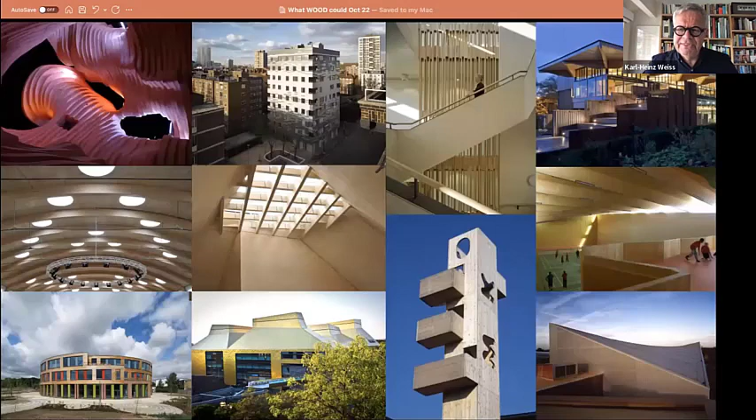Going back, just a quick introduction of myself and a bit of my journey, to explain why I got to this title of the webinar. Over the last 20 years, I have been involved in more than 150 engineered and mass timber projects.

This is a snapshot out of the work we have been doing back then in the UK. Whilst being really in love with timber, I started my career as a cabinet maker actually, and then turned into a master craftsman and studied industrial design and timber engineering. So there is certainly a very strong affinity to the material.

But whilst doing all these beautiful timber buildings and being exposed to that environment, I had actually been living there. This is the Barbican in London, built around the 70s, started off 1968 and took about 10 years to complete, where 5,000 people are living.

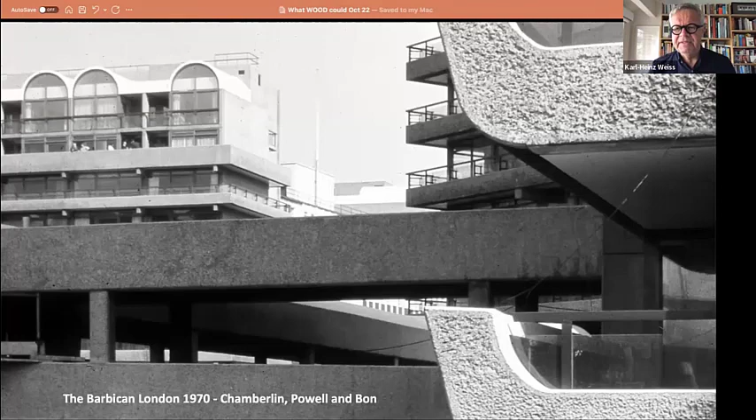I had the pleasure to live, and I moved around a bit in the Barbican, in this concrete brutalist structure. I had an apartment there, and later on I moved up there. And it was beautiful, because the space was right - the space, the cross ventilation, the layout was perfect. So it's actually not that much material driven.

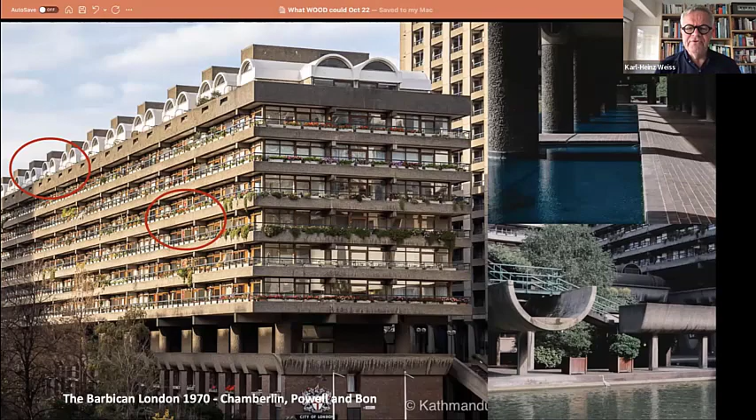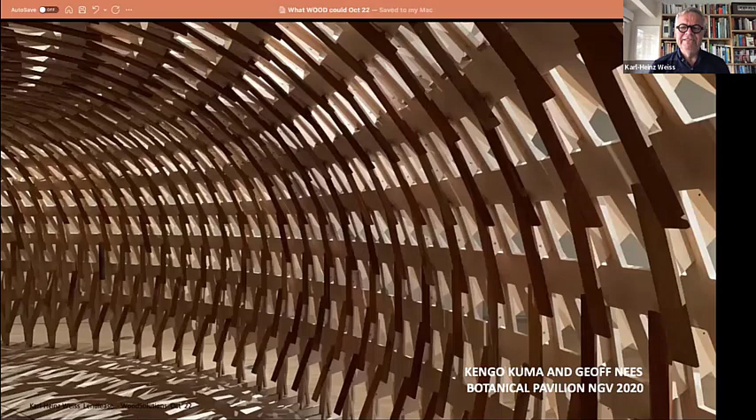At the same time, I found myself over and over again in very intriguing timber structures. And again, the space is right, and the space talks to you, and yes, the material is supporting that. In this case, it's the Kengo Kuma and Geoff Nees Botanical Pavilion, which was on display in the NGV in Melbourne for quite a while.

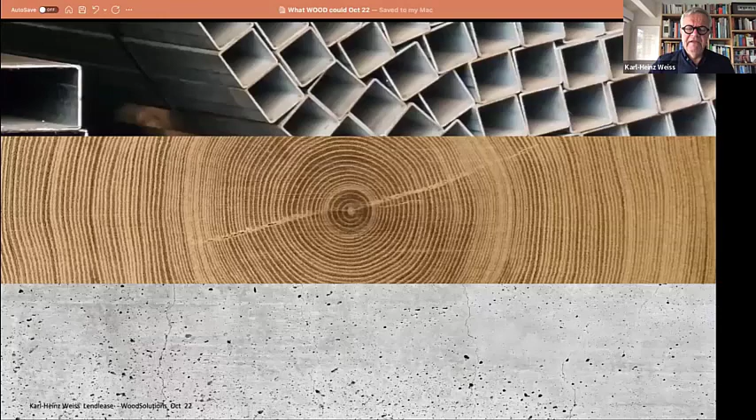Interesting to experience. So if I look into that and recap my personal history over the 40 years I have been in that space, I actually have to admit, I love the beauty and the haptic experience of timber. I love the elegance of steel.

And very early on in my industrial design practice and experience, I really loved the CNC-driven cutting, punching, laser cutting, water jet cutting, and CNC-driven folding of sheet metal. And I do love concrete benchtops, I have to admit. With all of that comes always a very specific smell of species, materials, process.

And I'm still wondering what wood would do if it could. That kind of relates a bit to certain limitations I see emerging more and more. The more we do, the more we learn in that space.

And if wood could do it, what it would like, it would provide us raw material in abundance and a material which is stronger than steel. It would provide an environment for everybody to work with, easy to install, no discussion around sequestration, always ready for disassembly because everything is a kit of parts, having a longevity of 400 years, no sweat.

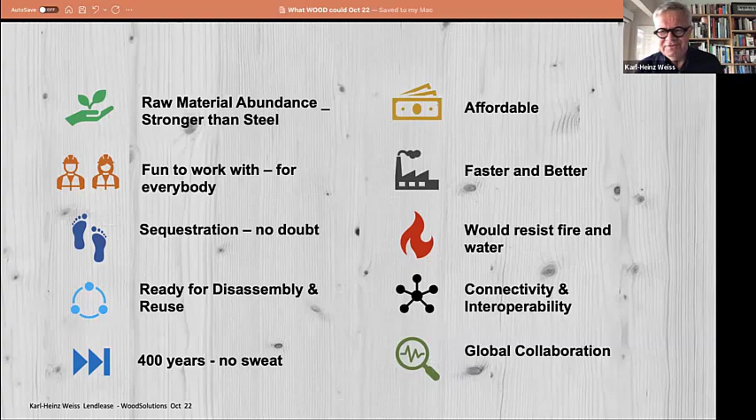And companies would collaborate globally, and systems would be easy in terms of their connectivity and interoperability. Fire wouldn't be a problem, water wouldn't be a challenge, and it would be affordable. So that's what wood would do if it could.

Today, we're obviously facing a slightly different situation. We have got raw material constraints and a volatile market, extremely volatile. We still see there's a cost premium because we don't seem to be tapping into the potential of really time saving and efficiency.

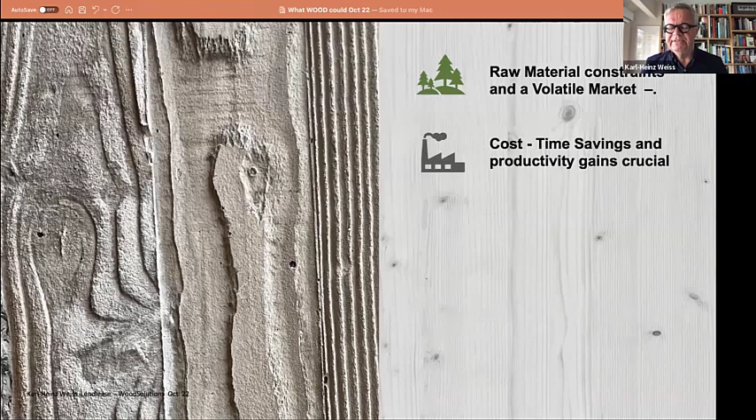There's a big question mark around what we're going to do with timber structures after the end of their lives. I have to blame myself for that - I was guilty of preaching the same story about 10, 15 years ago, saying after its life you can turn it into biomass. But meanwhile, with the whole carbon conversation, turning timber into biomass and burning it is probably not the best way forward, especially if we look into the material constraints we're facing.

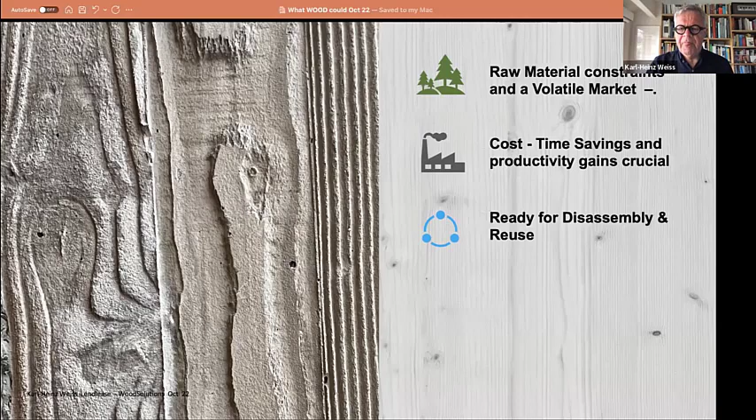It's a similar challenge. And the fourth one, which we see especially in the steel industry and the concrete industry, is collaboration - a sharing culture at a global scale has been developed way ahead of where the timber industry is today.

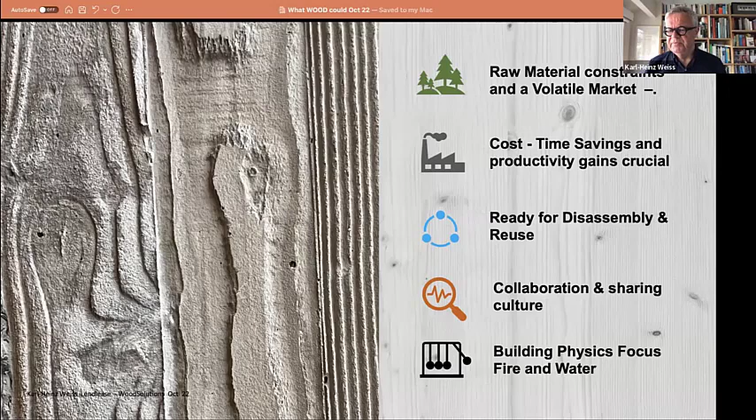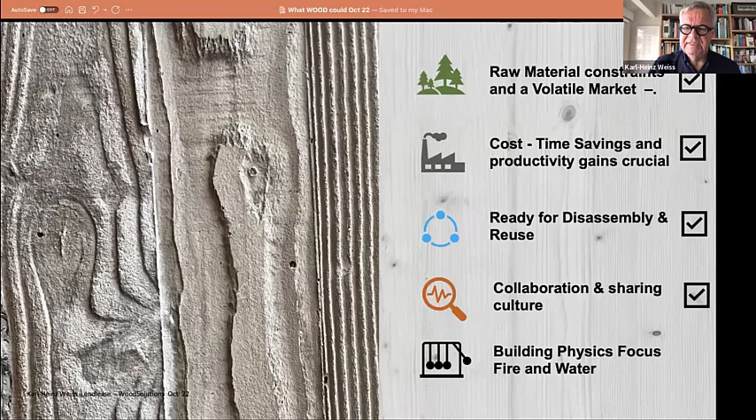And yes, there is a lot of work to be done in the building physics space - fire and water, just to name two of them. In the following slides I will probably only cover and touch on four of these aspects, because building physics on their own will require a series of webinars, and I'm happy to come back and contribute further. So that's a bit of a summary of what to expect from the following slides.

So if we look into the argument we bring forward on a regular basis - timber in abundance. If I just take a snapshot looking into global demand and the German consumption: lumber demand has been increasing significantly, and unfortunately this graph stops at the year 2020. It would be interesting to see how that curve has actually developed in 2021.

The diagrams are coming from the WWF and have been published in 2021. There's quite a bit of consumption in million cubic meters, and that's without bark - going back to the tree trunk with bark for lumber, for timber products, and for pulp and paper. If I look into German consumption, it's about close to three times as much as the global average. And if we break it down to the German market and the availability of material, it's actually more than what's growing in Germany - so there's a heavy reliance on importation.

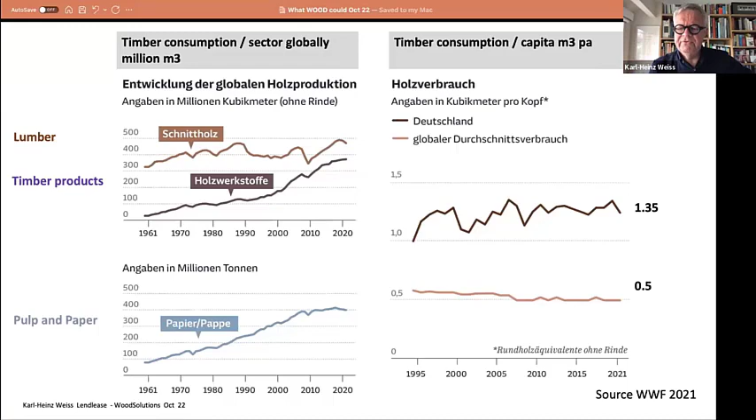So just to bear this in mind, if we design timber structures - where's the material coming from? How is it sourced? Are we really using it efficiently?

And talking about efficiencies, let's look into the typical lumber or sawmilling process. We know the process is not a very highly efficient process, whilst being very sophisticated. If we talk about a conversion of 50 to 55% into lumber, the residue is still of value because it goes into other processes. At the same time, the residue potentially represents structural properties, so is there something we can look into slightly differently?

LVL has got a slightly higher conversion, and the conversion could be increased, always depending on the diameter of the core. Typically the diameter of a core is still about 130 to 140 millimeters. If that core can be reduced down to 40 millimeters, then suddenly the conversion rate is increasing.

And if we look into CLT as such, which is a product we like and not that dissimilar to glulam, the conversion rate from a log to the product is actually very low. Obviously we've got the sawmilling process before, and there's an additional process in terms of planing, finger jointing, cutting, routing, etc. So that's something to bear in mind.

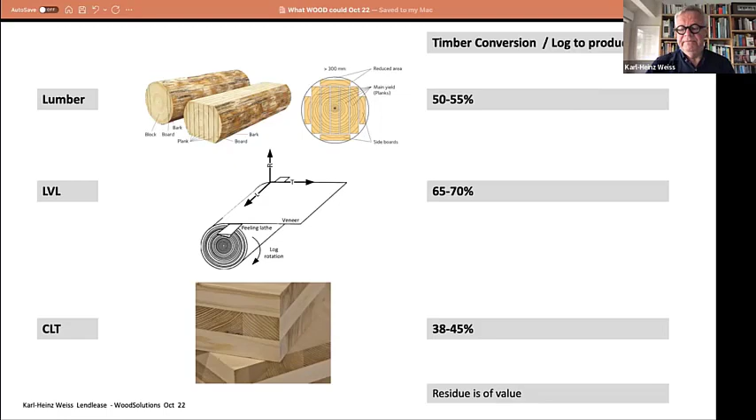The other one in terms of efficiency I'm coming across over and over again - and people working with me know exactly where I'm coming from - are we actually using standard section sizes? Very often we design towards a performance requirement and we're not looking into what's available at the market. So 240 is a great width for a glulam beam, and then 40 millimeters incremental in terms of height is a great starting point.

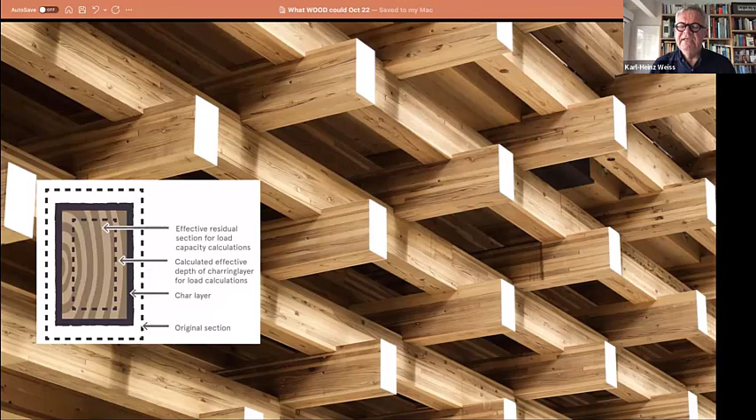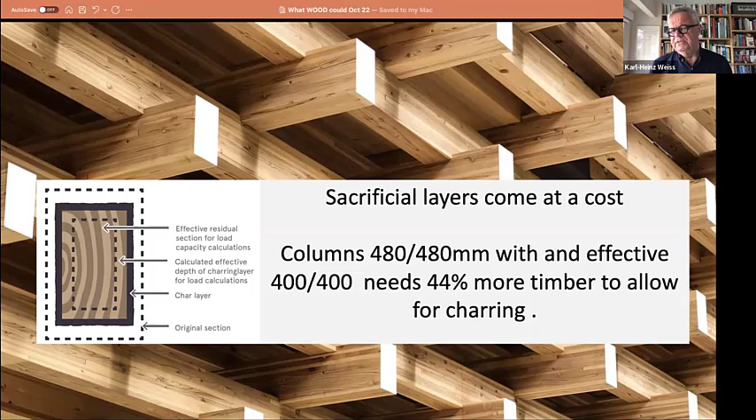But if you then suddenly apply what we all do on a regular basis from a performance and fire performance perspective - apply a char layer - then obviously our effective residual section is decreasing. Depending on the section size, if we do the math on how much timber we're putting in as sacrificial layers, it's actually quite significant. If you've got a smaller section size and still want to achieve 90 minutes, you need twice the amount of timber. If I take, for example, a 480 by 480 column with an effective section size of 400 by 400 to allow for that char, that means I'm adding 44% more timber to allow for charring. So certainly something we should look into and do more work on.

So I have been using the word efficiency, or effective, or effectiveness multiple times.

But do we have a good understanding? Because sometimes I've got a feeling we mix up effective or efficiency with productivity. So let's simplify that. Efficiency is getting more out of the resources, doing the same, or doing the same or more in less time. So efficiency is all about input and resource focused.

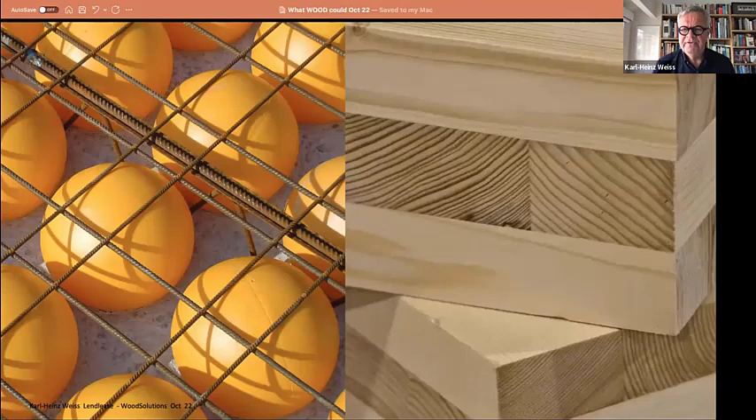Using another example of how markets and material suppliers are responding: putting a lot of concrete into slabs is not very effective, we're not using the material in the most efficient way. The bubble deck is one example. Bubble decks, or void formers, reduce the amount of concrete without compromising the structural integrity significantly, so the concrete reduction is very beneficial, even looking into the whole carbon discussion.

On the other hand, we all like the CLT product. The CLT product uses timber as the void formers, so it's a solid piece of timber. We did post-mortem analysis and looked into Stadthaus Murray Grove, for example, the first tall structure - back then we didn't know what we were doing, so we took a very conservative approach. The utilization of CLT as walls in certain areas had a utilization less than 10% from a structural performance perspective, which means 90% excess material in a structure which could be used differently.

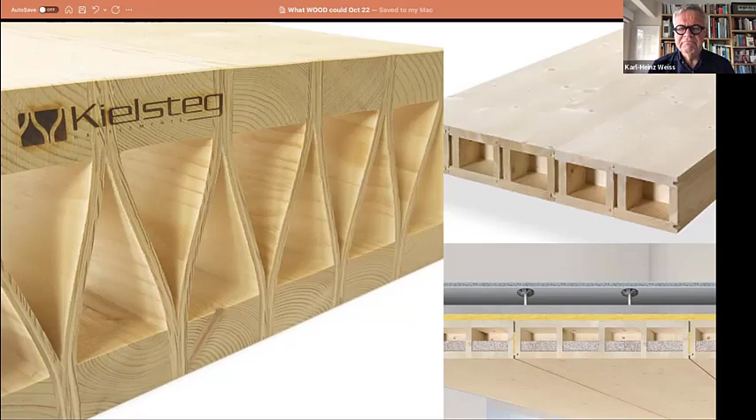The other one on the right-hand side is a Lignatur, more of a cassette system, but it's made out of solid timber pieces which are just glued together. What you can do in this case, and there's the section at the bottom, is utilize the void space for services distribution, for adding insulation for better acoustic performance, etc. Certainly a product to look into.

The other one the industry always faces as a stronger or growing competitor is the light gauge steel frame. There are certain interesting advantages to a light gauge steel frame. It's a cold roll process, so it can be very material efficient. If you look into the section I referred to earlier, the fascination about folding metal, which creates stability - these section sizes are using very little metal.

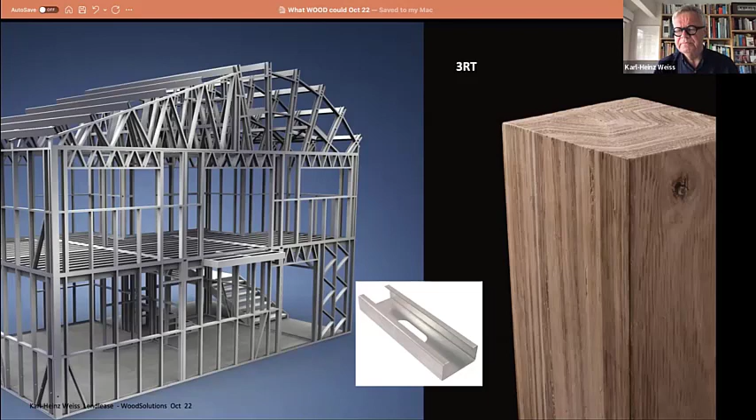At the same time, I came across 3RT, coming out of a Monash research project, now a company on its own. 3RT embarked on a journey originally manufacturing decorative timber products in a more efficient way. But I think the way the product is manufactured is actually an interesting aspect.

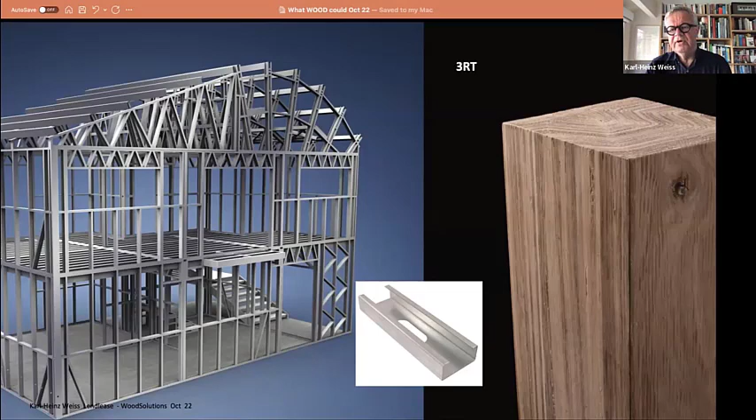So I'm going to highlight here with the two lines going through that block of timber, because 3RT is using layers of veneer and compressing the veneer from one side whilst it's already constrained on the other side. And suddenly you achieve that kind of folding structure, and folded timber will have different properties in terms of the torsional and bending aspect, not dissimilar to what you do with folding metal. So just to give you an idea what's happening in the industry and where opportunities lie.

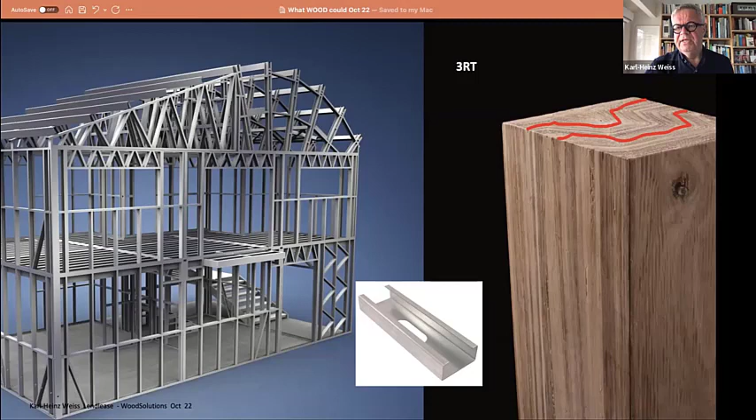As Alistair mentioned before, we have been looking very closely into how we work with the Building 4.0 CRC, what research projects we're doing. I just want to refer and touch on one.

It's called a long span low carbon floor system. We have been working here with Sumitomo Forestry, with Building 4.0, with Monash University and the University of Melbourne, and the whole research program was led by the Future Building Initiative, which sits within Monash. I'll just name here Dr. Ivana Kuzmanovska, Duncan Maxwell, Victor Bunster - Victor has been looking very much into the low carbon aspect, and Dr. Angela Solati, she's a fire expert.

So looking into the long span low carbon floor system, not from a product development perspective, but from a benchmarking perspective - what is out there? What is out there globally? And how relevant can these products be for what we try to do from a Lendlease perspective across all our regions?

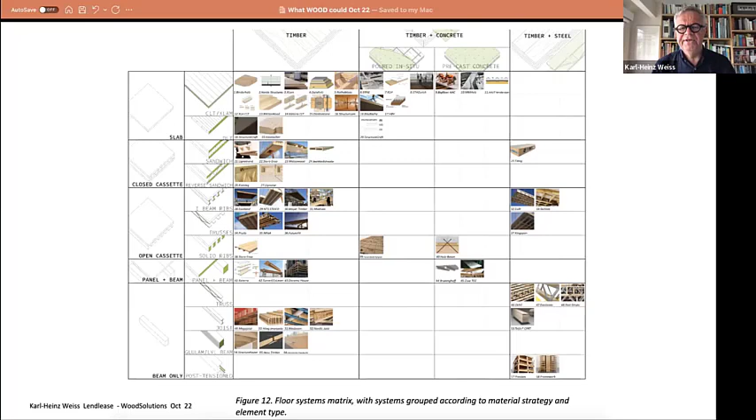As this was a benchmarking exercise, we used a building which Lendlease had been delivering, the Daramu house. It's an 8x8 grid. We used Stora Enso CLT open rib, the Kielsteg product, Lignatur as a product, the Stora Enso LVL close rib, and the Haslacher Brettstapel.

And then we looked into timber concrete composites. One of the criteria was, is that product available to the market? So having timber concrete in situ, we didn't look into that because we thought pouring concrete on site would actually slow down the whole process from an install perspective. So there's an acceleration requirement in which products we're going to choose for further research.

Cree, I'm pretty sure many people have heard about the Cree system, and then we looked into a TechSlab cassette.

In order to get a good view on benchmarking, we looked into what are actually the different criteria, defining that process and criteria, then looking into the weighing of the different criteria and the outcome of the research. So we looked into structure, vibration, carbon, fire, and we looked into production, availability, we looked into design, and within production there's an element of transportation.

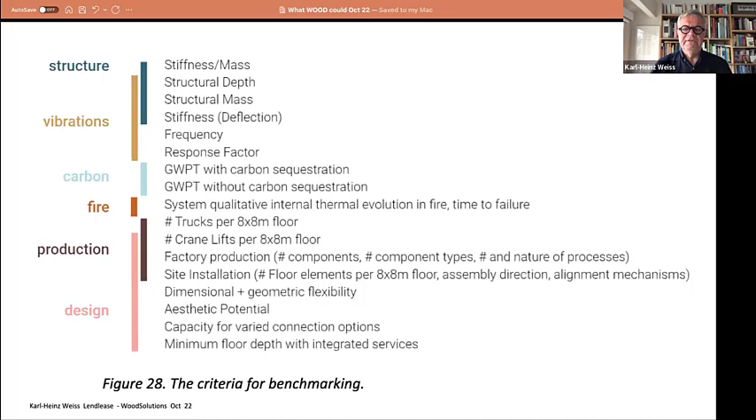We did a bit of a DfMA analysis. So how many panels can you put on a truck? What does it mean from an assembly perspective? And what are the alignment mechanisms? And then, yeah, there's certainly aspects of aesthetical potential, etc. So even just going through having these benchmarking criteria clearly mapped out and agreed was already worthwhile the process.

And to no surprise, obviously we didn't find a best in class. Best in class would have been number 1 or 2 in every single criteria. But we saw obviously structural criteria, different front runners, fire, vibration, carbon. The whole carbon investigation came up with a big challenge, saying how much sequestration of timber can you allow. So we went through both scenarios, with and without sequestration.

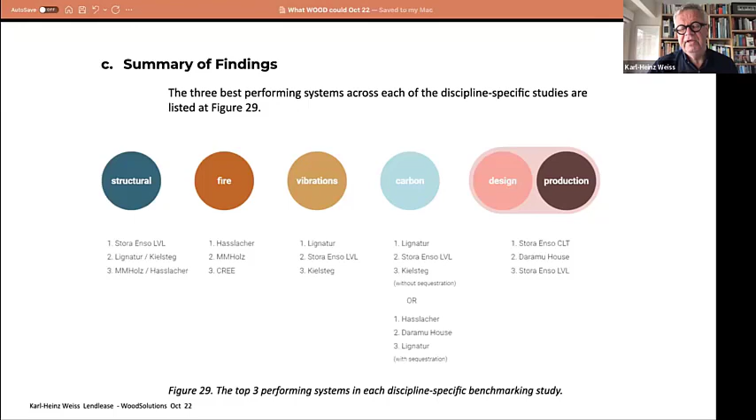And obviously, if we look into vibration, the concrete products typically come out as a front runner. In this case, we looked into without. That's where you see Lignatur, Stora Enso LVL, Kielsteg listed as the top 3, because we've looked just from a timber perspective in this case.

So that is just a snapshot, and the whole report and the workings we have been doing with the researchers, I think we're going to make available over the coming weeks and months.

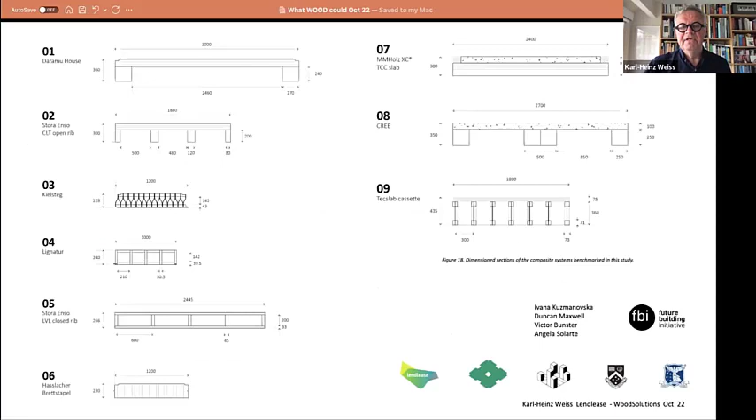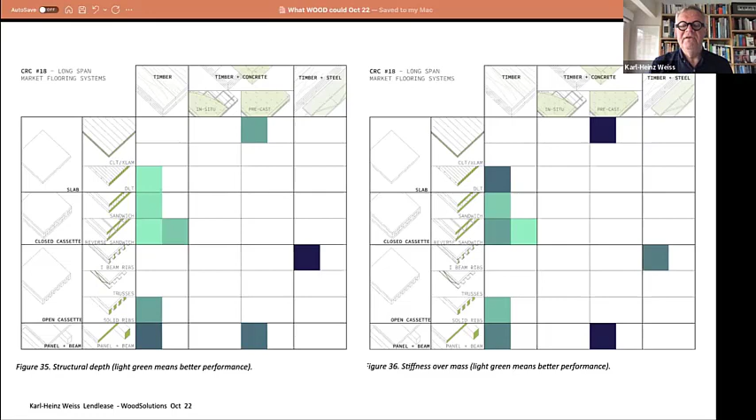So we looked into what's the structural depth, and you've seen that already in the previous slide deck here. There's actually a huge variation in terms of structural depth. We looked into stiffness over mass, and no surprise obviously, concrete, because it's adding a significant amount of mass, comes out, I call it, last.

So products with a lot of timber per meter square really are reliant on the allowance of sequestration in the carbon calculation. And what we found as well, if you do a proper LCA, the requirement meanwhile is to allow for sequestration in your LCA - you have to guarantee 100-year use of the product. Because we know once a timber product goes back into recycling or the process of potentially being transformed into biomass, it can be counterproductive.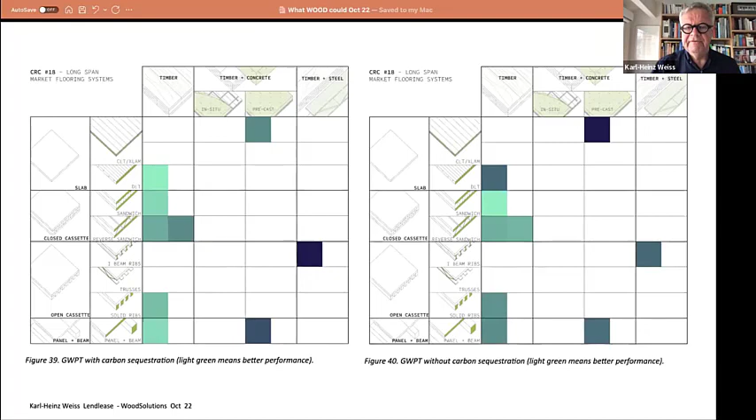So we looked previously into efficiency. Now let's talk about productivity briefly. So productivity in simple terms is doing more in the same time frame, so it's very much output focused. And I've got a couple of case studies here.

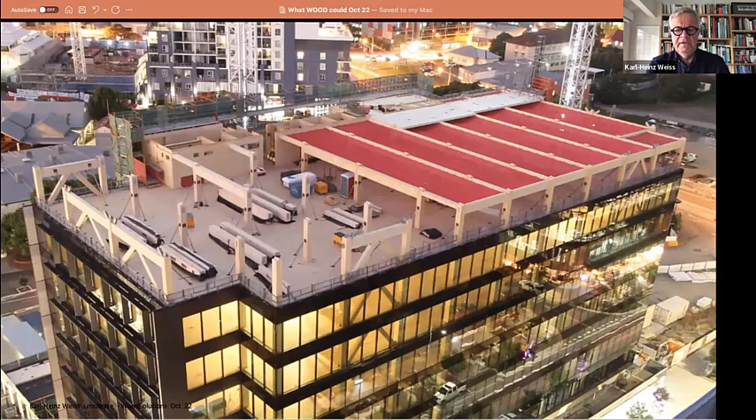Most of you are well across projects like 25 King Street. We used research for another research project where we dissected 25 King Street a little bit further. However, this is one of my favorite slides of 25 King Street, because what you see is still work in progress from an install perspective - there's the vertical structure still going up, columns and beams.

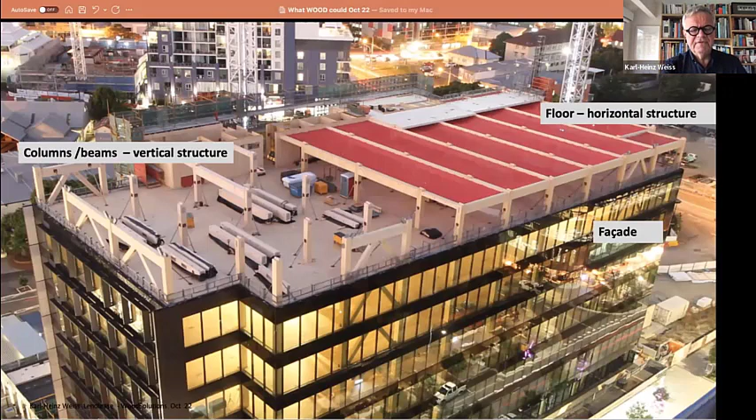The floors are going in, and interestingly enough, the facade is actually one level below the superstructure. The facade has been chasing the superstructure, which is a great outcome.

But if we look very closely, then the subsequent success of the project is we left the DfMA approach and that interaction between facade and structure. As soon as it came down to the services trade, we did everything in a traditional way.

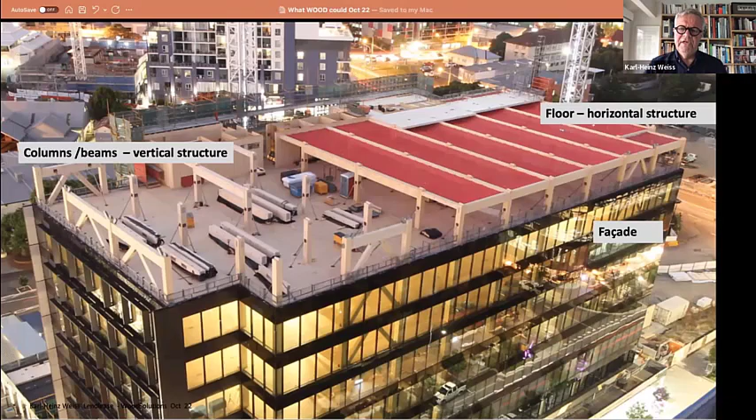So one of the questions back to researchers was, is there a critical mass required to really achieve time and program savings? If we look into the very high level cost structure of construction, we see superstructure is probably around 15%, facade around 20%, services around 25%.

So the conclusion here is actually to really achieve program savings, it needs to be more than one or two trades driving prefabrication. You have to look into the whole project life cycle, the whole value chain of a built project.

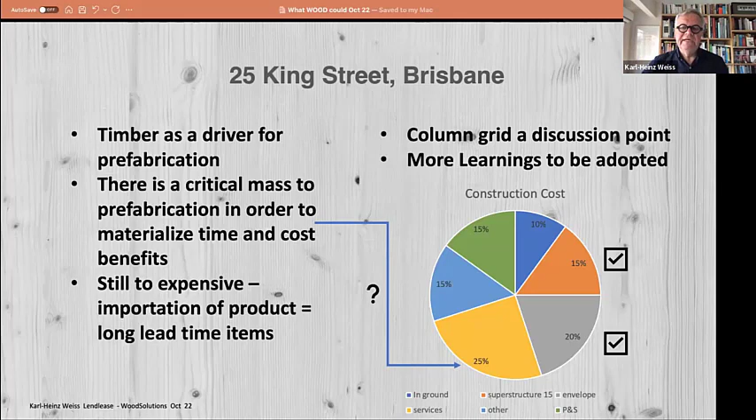So bringing services into the equation for commercial buildings is absolutely essential to drive program savings and therefore cost savings, to offset the slightly higher cost of the superstructure.

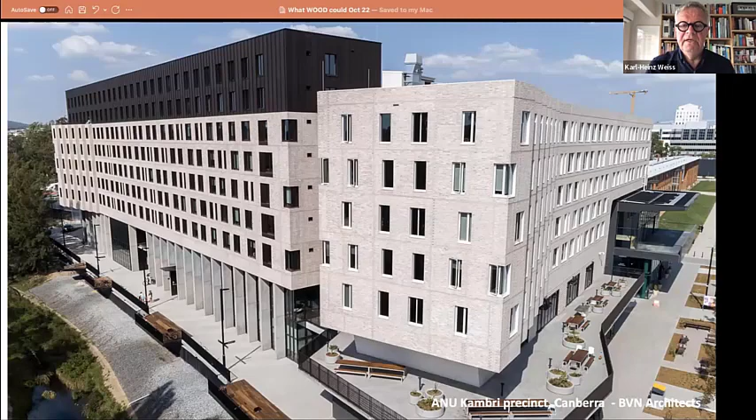The other project many of you have seen, the ANU student accommodation building, BVN architects - a very similar situation. Some interesting learnings here as well I would like to share.

What we see, obviously, is a great outcome - a CLT superstructure going up very fast. And in this case, the facade system has been a bit slower.

But on the other hand, one of the big learnings out of this project is the facade installer was not a different company to the superstructure installer - it was actually the same. So integrating trades from an installer or assembly perspective was absolutely crucial.

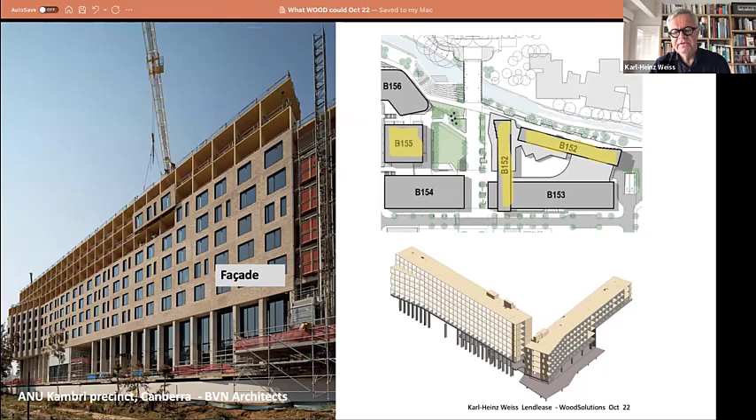For the business, the only chance to deliver this project in a very tight time frame was actually diversifying the building systems - by not having everything built in concrete, but having some buildings as concrete structure, concrete steel structure, and some buildings in timber structure.

The diversification of systems made that possible, because suddenly you've got access to more trades you can bring in, and you're not having that bottleneck of a concrete supplier, a formworker, reinforcement supply, which at a project of that scale would be heavily burdened.

And the other point I mentioned before - the installer of the superstructure is the facade installer at the same time. That's a very good observation out of this project, and it gave us the possibility to meet both time and cost requirements.

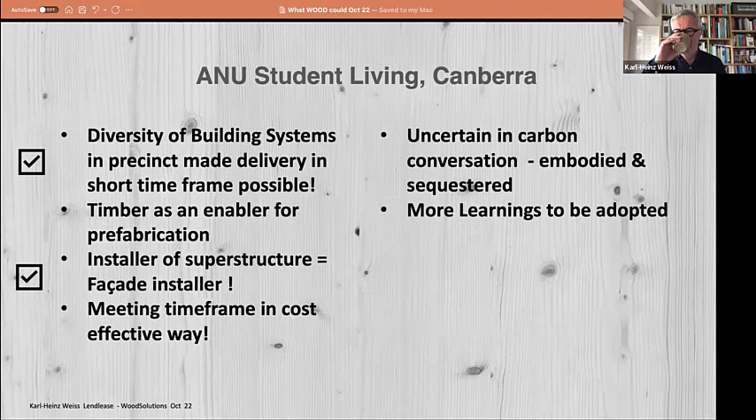So in other words, what I described, we went through a bit of that journey of what is efficiency, what is productivity, and how they actually interlink.

We look into input and output, and very often we try to push more and more through the work in progress to get more output. But actually, that's not a way to increase output, because we're at risk of really jam-packing the work in progress and blocking the pipeline.

So to look into how we can improve output, we have to look into what's in work in progress and what's happening there - can we reduce the cycle time? Reduction of cycle time means we get more output, and therefore we can pull more input.

So that's a bit of a summary which wraps that up. Do we understand efficiency, productivity? How do we get to more and better output? We have to look into the throughput and the relevant cycle time aspect.

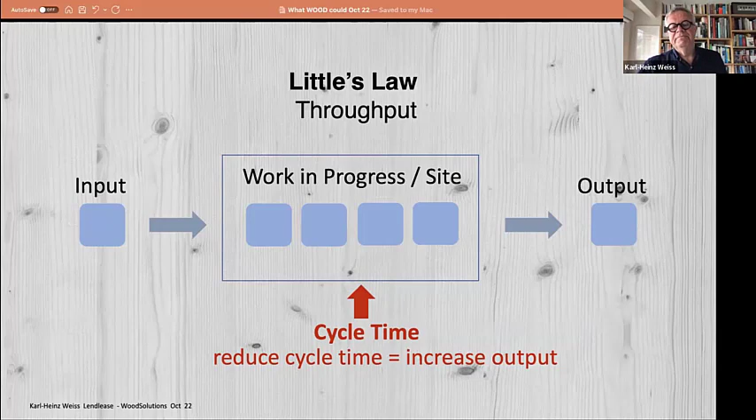And coming to cycle times, connections and connectivity is actually an important part. I'm going to show you a very quick video here.

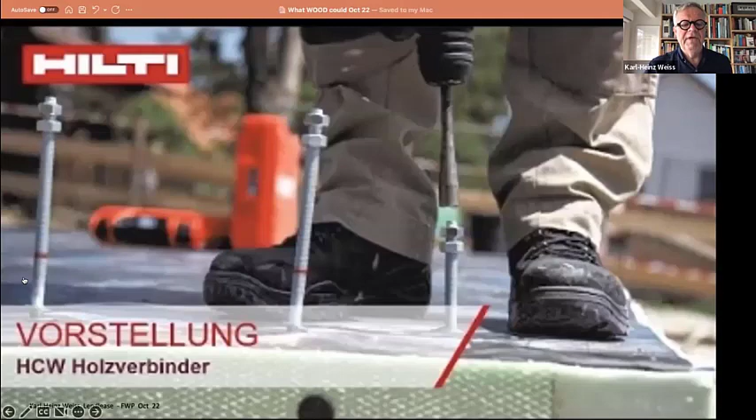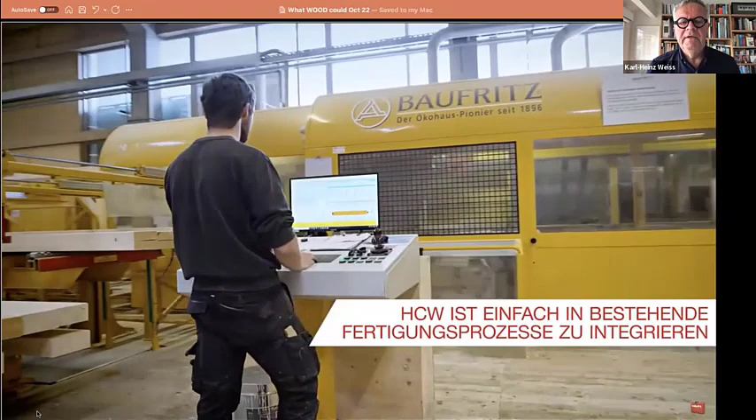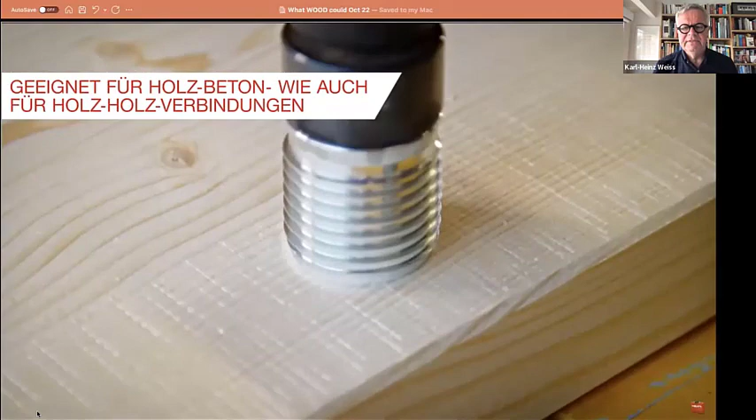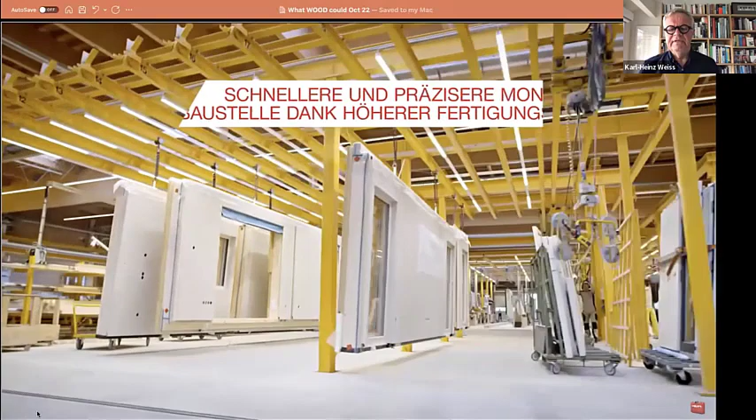And that video is coming out of Germany, and sorry about the German text. It talks about the HCW connector, which has been developed in collaboration between Baufritz and timber frame companies or house builders and Hilti in Europe. And what that shows here is actually the connector has got such an important role in the efficiency.

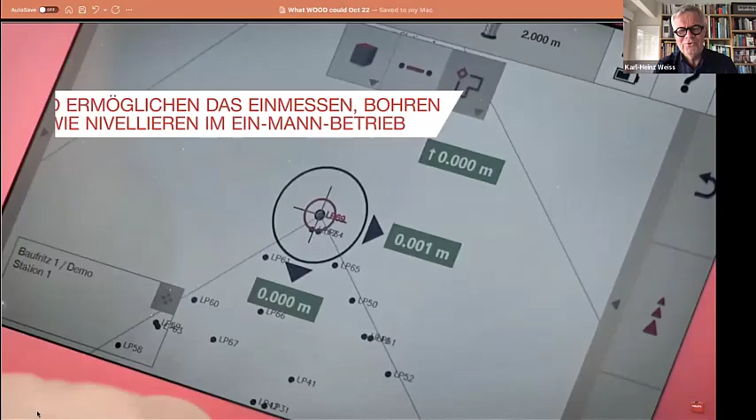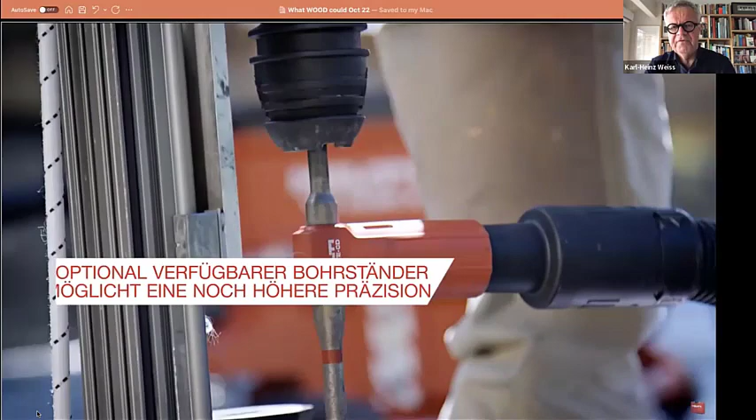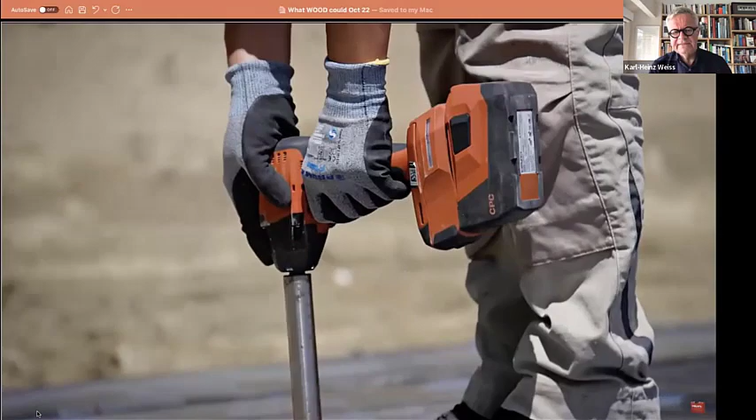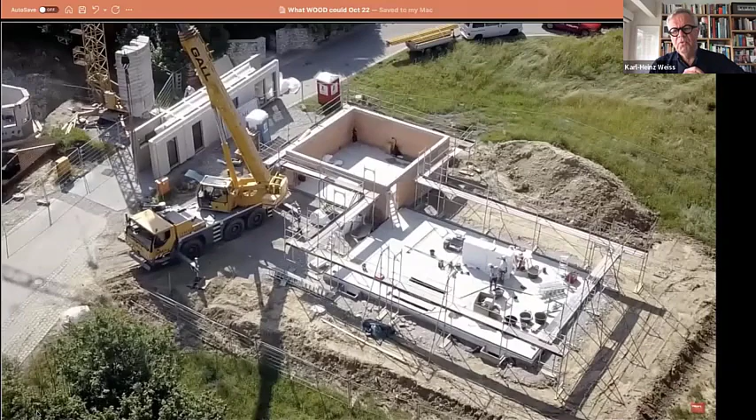And subsequently productivity, or call it according to Little's law, the throughput on the building site, because it takes out about 30% of labor, and it's accelerating the setting out by utilizing the relevant tools. No surprise, and pretty sure other companies will follow that soon. There's a direct relationship between the connector, the design model, the fabrication, how the setting out and the tools for applying the connectors. All of that is completely interlinked.

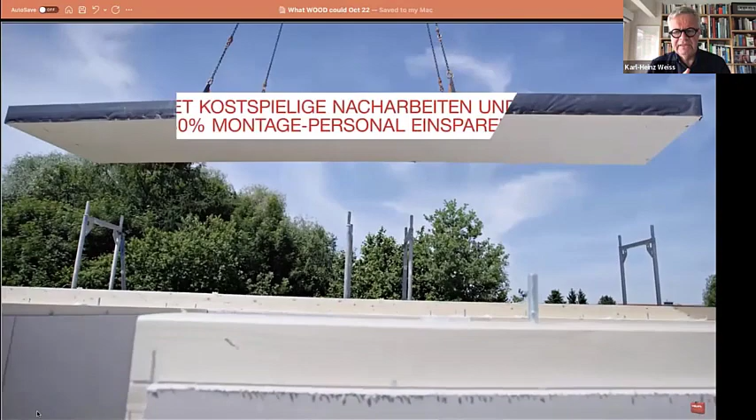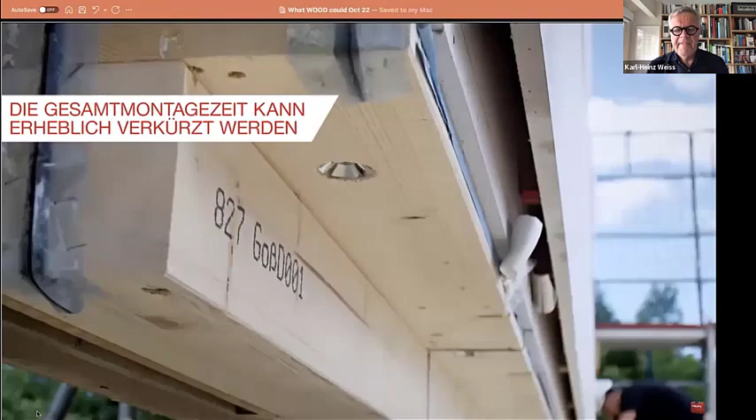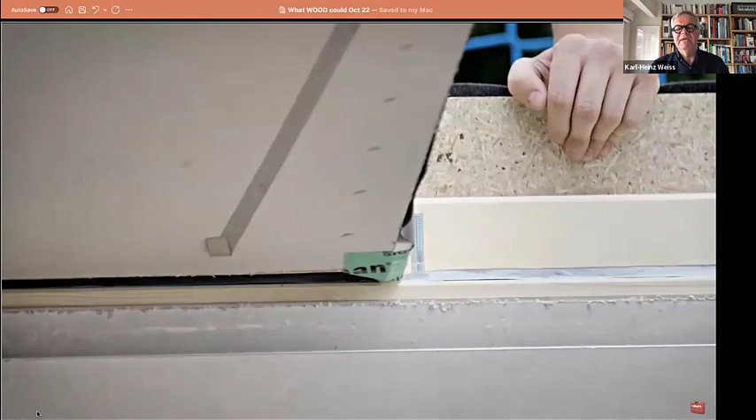And these connectors work from timber to timber, concrete to timber. And for me, it's very interesting to see a company that originally created tools to drill holes into concrete, and then became a world leader in fasteners and concrete anchors, fasteners into concrete, now embarking on a journey towards applying their knowledge in the timber world.

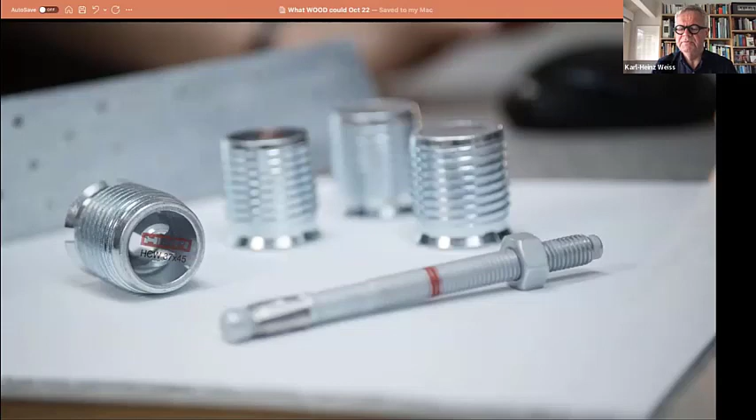So again, that's a snapshot of that specific connector. There is another reason why I showed that video. I think that specific connector we have seen, the HCW, is relevant for everything we do here in Australia as well. From a house building perspective, I think it has got its place in the low to mid-rise.

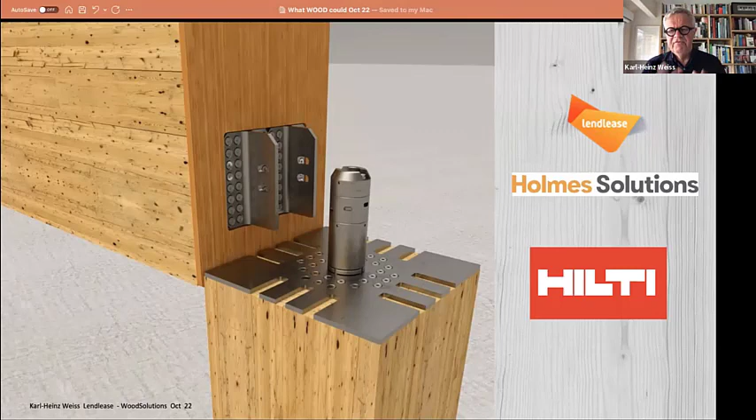But if we look into the mass market, we have been looking into how we can improve our throughput on building sites, how we can shorten the install time. And we always talk about hook time in this case, hook time being the bottleneck. So if you put up a column, you have to temporarily brace it before you can release the hook again. So can we develop a self-propping column, a self-propping connector for columns? And the same for the connector for beams meeting columns.

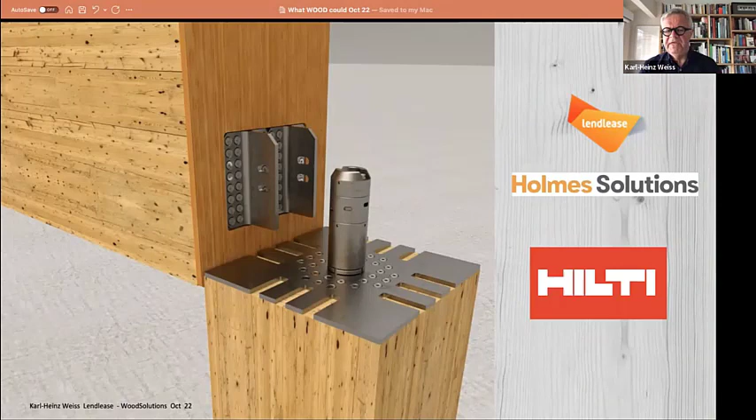And this is a collaboration between Lendlease and Holmes Solutions out of New Zealand. And subsequently, we engage with Hilti as being the manufacturer and distributor of the product. So that self-propping connector allows us a 5 to 10 times faster install time on site. And that's significant. That's increasing, again, what we saw earlier, throughput significantly.

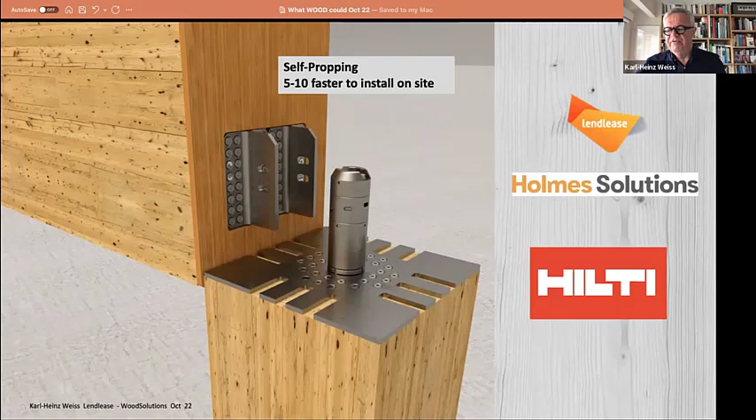So I covered that briefly already, connection and connectivity. And again, looking into how that connectivity will play a role and where technology will play a role in the future from a digital platform perspective. I'm not going into too much detail because digital platforms could be another topic for a webinar, but it's all about bringing the decision points. A lot of us talk about early engagement, but let's bring the knowledge and clarity around when we have to make which decision right up front into the process. And that's what our platforms will enable us to do.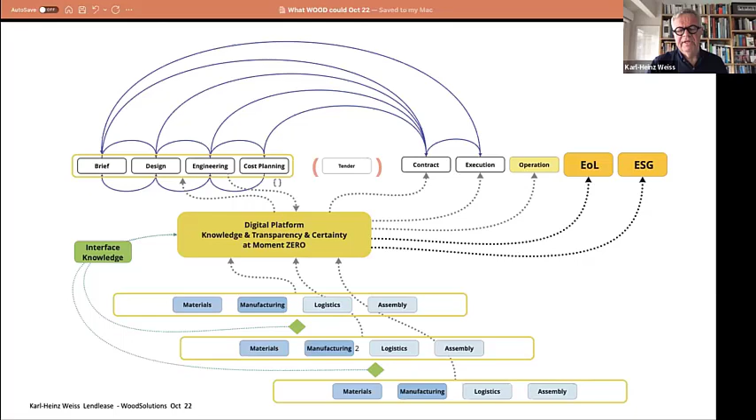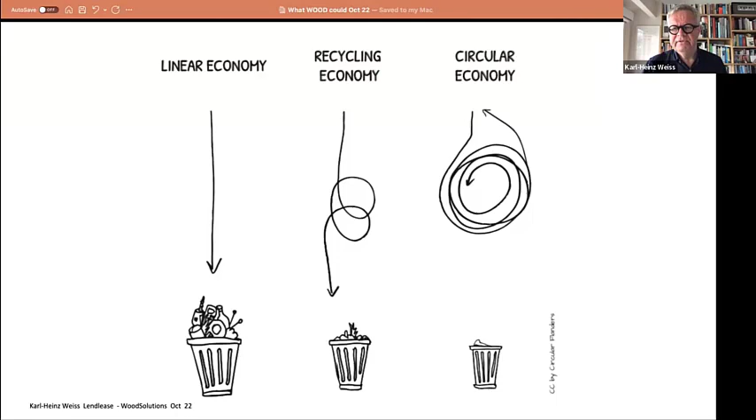Other topics which will be coming thick and fast: circular economy, the reuse of products. The other big topic, ESG - environmental, social, and governance. And if you look into some of the line items, it looks into materials, resources, resource efficiency, waste management, water consumption, etc., and covers all the aspects of supply chain management, procurement, diversity, equality, and ethics.

So it's the first time I see in my life that the original intention of sustainability is now driven by an incentive and not perceived as a cost burden. Because the incentive through ESG comes through the capital markets. Once you're ESG compliant or you outperform ESG requirements, the access to capital will be much easier. And that's certainly something to keep an eye on in the very near future.

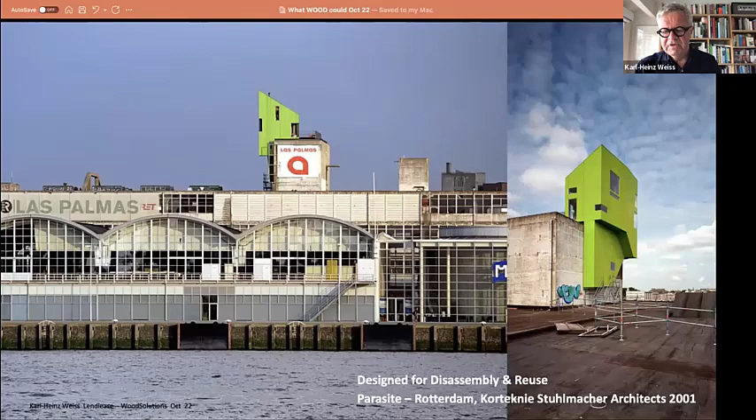This is coming for the Australian market thick and fast. I think it has arrived already in Europe, and there's more to be expected. And just to close out, I haven't seen many buildings which have been actually designed for disassembly. And that's a good example.

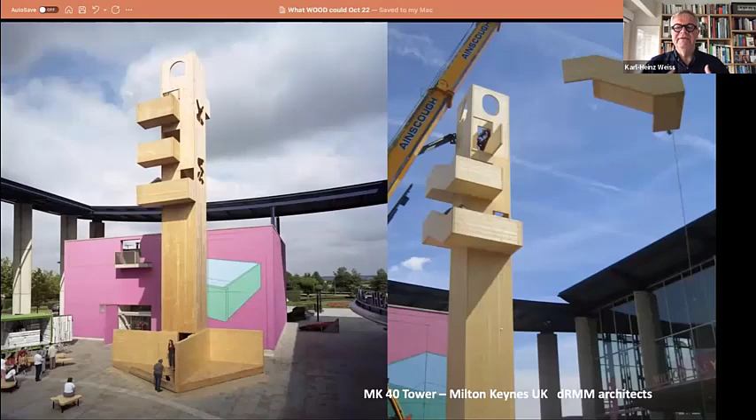Korteknie Stuhlmacher, an architectural practice out of Holland, have been my early heroes in that space. They have been building that little parasite on top of a warehouse. And that was already with the intention it will move on. That's a CLT structure. The other one, again, is more of a temporary nature, and temporary nature drives thinking around disassembly.

The Mk40 Tower by dRMM architects, where we have been challenging ourselves. We can't anchor things in the ground, so how can we make sure once people are going up and down and there's wind, that tower is not falling over? So that tower was in place for a year, was dismantled, was put up in another place, was dismantled, and I think it found its final home in the meantime. Very similar to Parasite, reused over and over again.

By closing, we're putting ourselves at Lendlease under significant pressure, because we came up with our Mission Zero and then the embedded carbon targets for 2025 net zero. Net zero here looks into scope 1 and 2, what kind of energy we're using. Are we still burning diesel and gas? But from 2040 onwards, we're going to measure ourselves differently, because we'll be saying absolute zero, not net zero, for scope 1, 2, and 3, which looks very deeply into materials and materiality. Where's material coming from? How is it used? Can it be reused, etc.

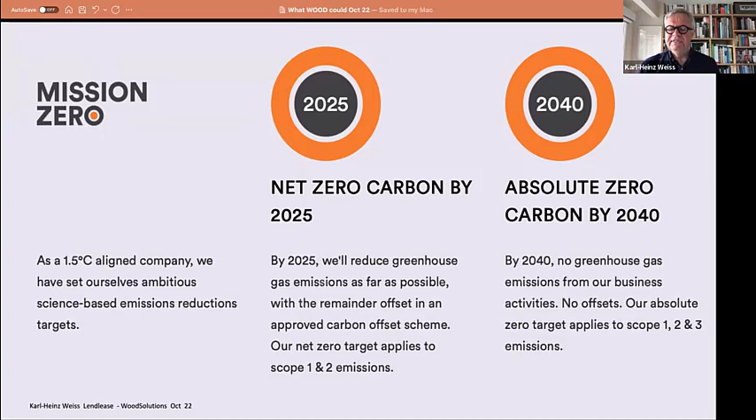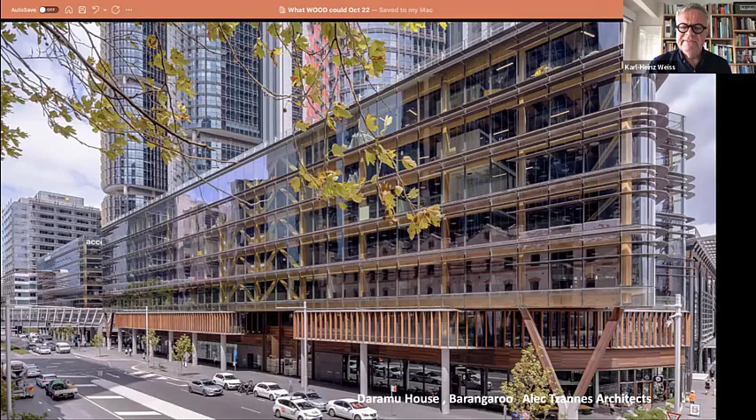So I'm coming to the end, leaving a bit of time for discussion and questions. Just a snapshot and a reminder - whilst people haven't heard much of Lendlease in the last couple of years about timber structures, Daramu House with Alec Tzannes architects, I think it's still an outstanding building, full of lessons learned, and a great environment to work in.

If we recap Lendlease's journey over the last 10 years - going back to 2012, we started with the Forte building down in Melbourne. We now have delivered 20 engineered timber buildings across 3 regions: Americas, United Kingdom and Australia. And we're still learning.

That's something we certainly should take on board. There's so much work to be done, and so much work to be done we can't do in isolation. I know 10 years ago we were doing this quietly before delivering the Forte building in Melbourne, but we can't do it on our own. We have to tap into research and collaborations, and Building 4.0 is a great chance for that. We've been embarking on research projects with partners - just to name Sumitomo Forestry, or A.G. Coombs in the services space. So we're still on the learning curve, and looking forward to more to come. Thank you.